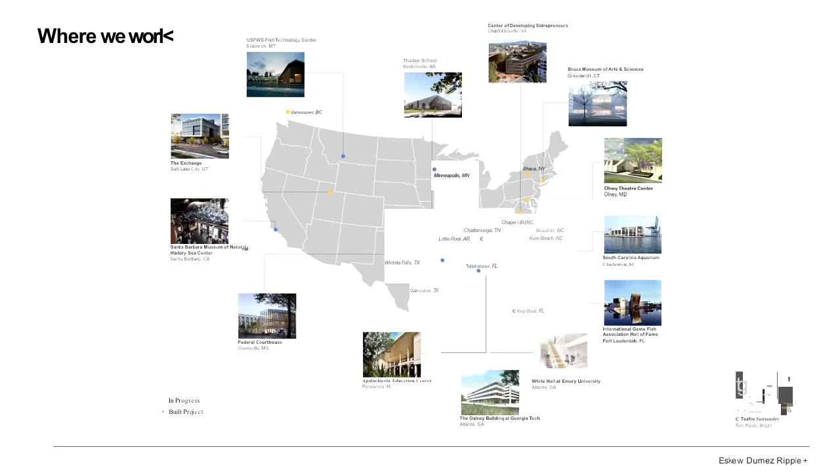So our firm is a firm of about 50 people based in New Orleans. About 70% of our staff are LEED accredited, but only about 10% of our work is LEED. So we're trying to infuse what we do with sustainability, whether or not there's certification involved. In 2014, our firm was honored with what they call the Firm Award, which is a way of singling out one practice each year that practices can look at.

We are based in New Orleans, but we work all over the country. We work for a lot of different universities. I just got back from a project we're doing at Cornell. We opened a building recently at Georgia Tech that I'll show here. We've worked with some community colleges as well. And we do all kinds of different building types. So we have a short attention span. So we work on performing arts buildings, research labs, office and conference centers, culinary programs, active learning classrooms, dorms, and student life projects.

And our practice is, I guess, unusual that for a firm so small, we sponsor a research program within our firm. So we hire one or two full-time people each year to help investigate a research question that we wished we could force ourselves to do our homework on, and so we make them do our homework for us and explain everything to us. So through that, we've examined topics of building performance, resilience, community engagement, health in the built environment, the intersection between civil engineering and landscape architecture to improve sustainability and resilience and make cities more fun, a deep dive on building envelope technology, sound and vision, and the perception of buildings.

And then the theme this year is called Deep Impact: Paths to Carbon Zero, because all of the announcements say that we have to get to net zero carbon operation in about 10 years, and we have to get to dramatically lower carbon footprint of construction. And so what our research fellows are doing this time is documenting 12 case studies of what it would take. There are some projects that are on track for doing that. There are others where you could run the numbers and say, here's what it would have cost. Here's the least cost path to doing those things. And so we're going to be sharing those results out through conferences and also guides that you can download off our website.

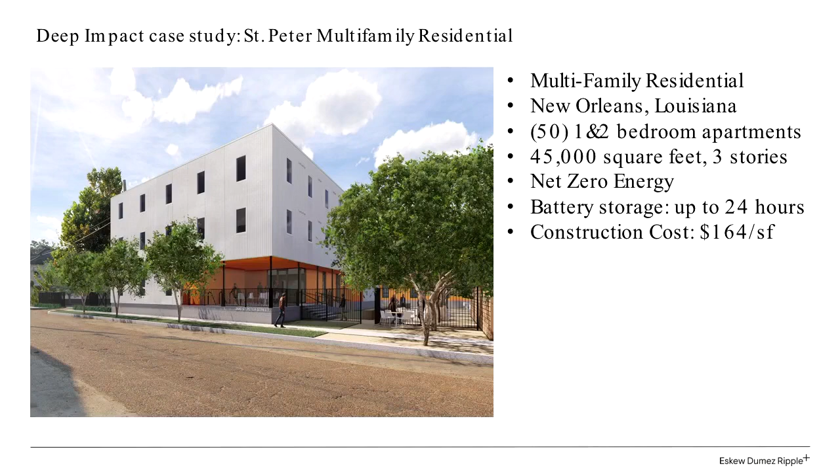A first case study right now is a project that's under construction, getting ready to open actually at the end of November. And this is the first case study to come out of that work. This is a multifamily, very bare bones, Spartan, low-cost, affordable housing intended largely for veterans and veterans with children. It's 50 apartments, 1 and 2 bedroom. It is going to be a net zero project, and it will actually have the ability to island off the grid when the grid goes down, as it does with embarrassing frequency in New Orleans due to windstorms. And it was built for $164 a square foot.

And so this is an example of the kind of work they're doing in terms of explaining that when you build a building, there's the kind of burp of carbon dioxide from when you made the concrete and when you made the steel, and if you had to cut down the trees to make the wood and so on. And then there's the carbon emissions associated with running the building every year. So this is a typical multifamily building as we build standard practice in the US, and it uses electricity and gas, and obviously there's emissions associated with electricity and gas. And therefore there's a little more carbon each year. So the cumulative amount of carbon emissions is signified by this carbon life cycle plot.

The goal that's been established by the Architecture 2030 organization is basically about a 40 to 50% reduction in the carbon emission of construction, and then net zero operation. And how they lay out a pathway to net zero operation is a mix of: you make a good, efficient building, and then you operate it right, and then that building might have some on-site renewables, some solar panels on the roof, let's say, for most climates. And then the rest, if there are still net emissions, their plan is that you can basically buy into schemes where renewable power is being produced off-site, with third-party certifications so you know it's really actually happening. So that's that middle line, that green line.

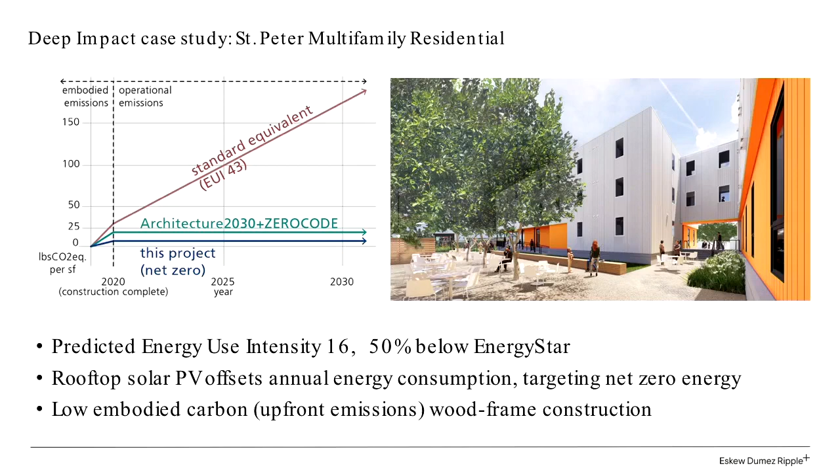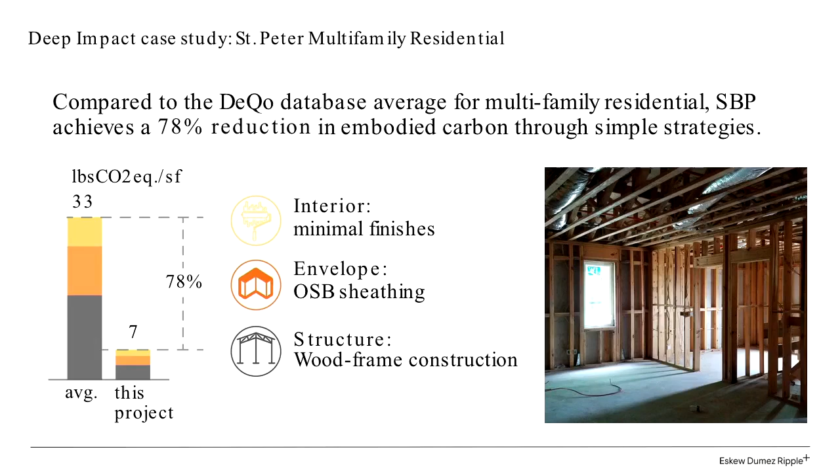So time will tell as that building goes into operation, but we're pretty hopeful. This is an example of the kind of analysis of typical construction where there might be concrete floor slabs, a very energy-intense building envelope, say brick or Alucobond or something like that, and then the interior finishes. Every choice we've made here, we've made for lower carbon of construction.

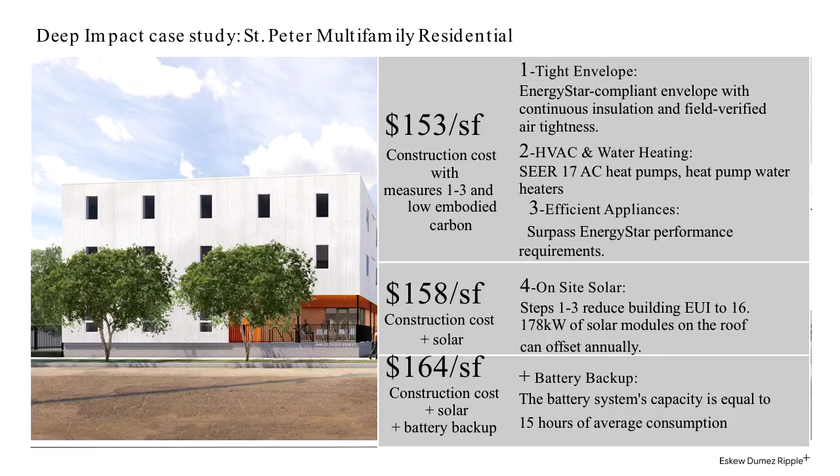And of course, the real question is, what does that cost? And so this project was spec'd out to cost $153 a square foot, just trying to do things sensibly. And then through a series of upgrades to the HVAC and adding solar and then adding battery backup, we've taken it to $164. So this is a very competitive price target. Now, obviously, that offset is an offset you could apply to fancier projects, less Spartan ones going forward. So that's just an example of what we're trying to do in our firm and what we're working with.

There are a lot of great firms in this room that are trying to pick up their responsibility and see if they can't improve their overall performance. And as architects, there's what we do when we design, and then there's the rubber really hitting the road when the buildings are opened and operate. We have to work with facilities people, who can make or break whether a building will perform as we'd expected.

So the American Institute of Architects has created this thing they call the 2030 Commitment. And as an architectural practice, you can sign up for it. And what it says is that you will basically write everything down. You will enter into a spreadsheet or an online database every project you're working on that year and what building code or energy code you're building it to, or if you've done an energy model, what you think the predicted energy will be. And it will add up the cumulative impact of all of your projects. And then they've set a set of goals where we aspire.

I aspire to a full head of hair.

I won't achieve that. But where you aspire to better and better performance, every 5 years the bar gets raised. So the gray bar here is the sum of all of the architecture firms that are signed up for this. Currently, those firms that are signed up are responsible for 30% of all construction in the United States. So even though it's only about 250 firms reporting, it's all the big guys who are doing all the big buildings. The green bar is our own firm tracking our own portfolio. And we chose, you're not required at all to make it public, we chose to disclose.

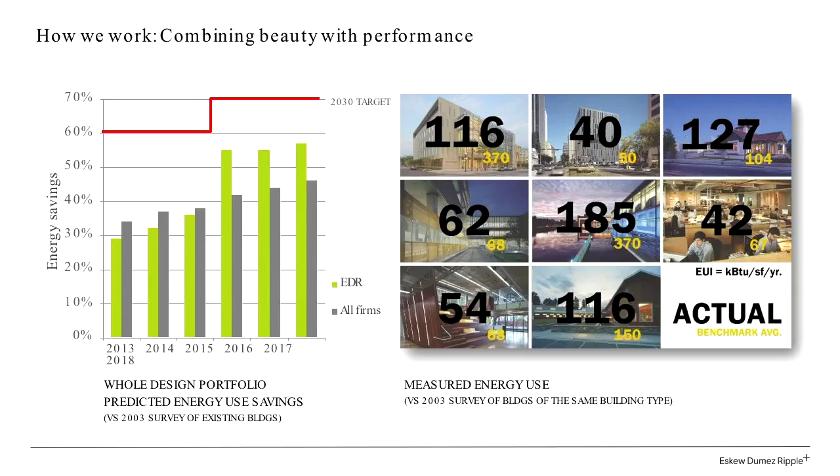Back when we first started tracking, we were tracking behind, but we were slowly inching up. And then as we applied more and more and better tools, we found that our portfolio got better and better. And so we've been sharing what we've learned from that. So this is all about design. And this is about new buildings, major renovations, and even minor renovations where you're doing things like just lighting upgrades. You track it out.

The Department of Energy does a big survey of the average energy use of these buildings. And it's sorted by building type, because laboratory buildings tend to use a lot more energy, schools more in the middle, single-family homes, and then finally apartments, often the lowest of common building types. The one building type that's even bigger than laboratories is fast food restaurants, because you've got all those deep fryers going in a small amount of area.

But the energy use intensity, and sometimes some of our projects actually use above the median, but we think it's important. That's how we know we're not fibbing, is that we'll show you a few of the projects that don't do as well as the average one. So that tracking of real performance and predicted performance is, we think, an important way for architectural practices and clients working together to do better.

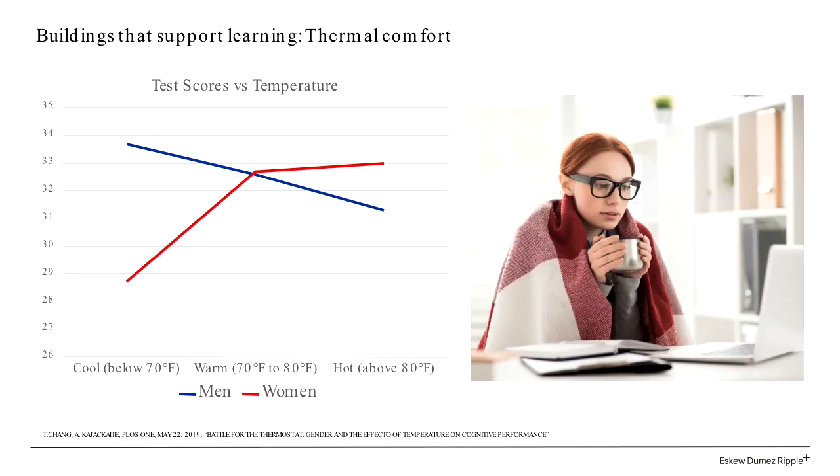One of the really interesting things that's just come out in the last year or two is, it used to be that when they did a lot of psychological and learning measurements, to keep it easy and controlled, they would only use men as test subjects. And so we have all these curves about what qualifies as thermal comfort and so on. They're all based on men, particularly college students, particularly in Kansas. That seems to be the hotbed of when a lot of this testing happened.

Recently, this was a study with people in Berlin of a range of ages, but they did a whole bunch of tests on math, cognitive reasoning, and verbal performance, and they scored it, and this is the median score. Of course, there's a huge spread, because we're all different. Not all women are the same, not all men are the same, but they did notice that there's this particular shift, which I noticed in my office, and I don't know if you notice in yours, is that on average, women tend to report being colder. Even at the same level of clothing, they'll report feeling colder than men. And if it's men in charge of the thermostat, you can imagine what the impacts of this can be.

So as we start to think about making good spaces for learning, because this is an institution of learning, it's very clear that there is an impact on performance with temperature. And what's even more interesting is how do we provide, given that we're going to have a room full of people, and not all women have the same point of comfort, not all men do. So one of the interesting shifts is people are starting to say that they want you to plan not for a uniform temperature across the room, but deliberately a variation in temperature. So the people who are comfortable with cooler and work best there can sit over there, and the people who are more comfortable with a little bit warmer can sit over there.

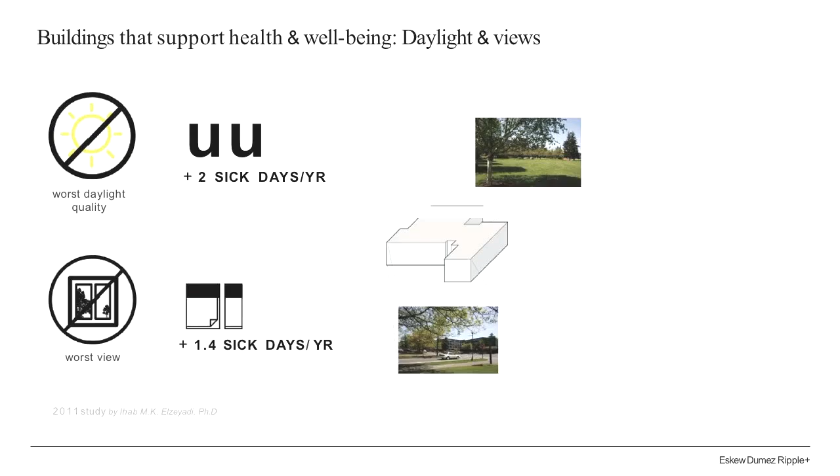And from all that, they get a rank-ordered spectrum of the nicest views to the least appealing views, straight into the cooling tower or whatever it was that the worst view was. And then they anonymously got the health records and absentee records, sorted by where those people sat and what view they had.

And what they found was that the people with the worst daylight quality took on average 2 more sick days a year, and the people with the worst view took on average 1.4 more sick days a year. So these things that we think of as luxuries or amenities, if you think how much a sick day costs a business, actually have real financial impacts.

But now I want to talk about, since we're all talking about carbon dioxide, and we're all talking about global warming and climate change, we all know that when I was born, now 60 years ago, carbon dioxide levels outside were around 250, I think, parts per million, passing 300. Now we're at about 410 parts per million.

And when I was growing up, I watched Star Trek. In the keynote, there was that talk about the original Star Trek, and there was always the life support system shutting down, and the people were like, oxygen, I need oxygen. And yet the funny thing was, with Apollo 13, a few years later, it wasn't that they were running out of oxygen. They had plenty of oxygen. What was happening was that when we inhale oxygen, we metabolize and we exhale carbon dioxide, which means the carbon dioxide level would normally go up.

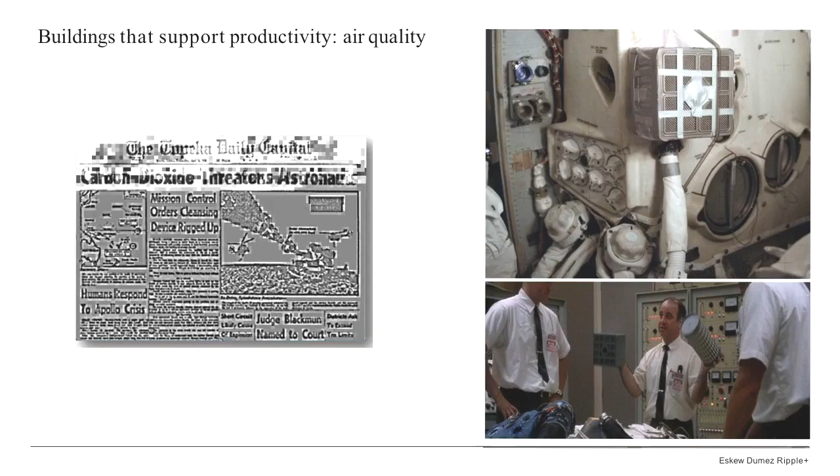So rather than carry a greenhouse behind them on the spaceship, they had these special filters which basically absorbed carbon dioxide. And their problem was that the system of filters that absorbed carbon dioxide was broken or they didn't have enough of them. And so you remember the great scene from the Apollo 13 movie where the landing module had one format of carbon dioxide absorber filter, and the main capsule had a different one, and they had to make one fit the other.

So this is what they actually did. And of course, the most important component that they had on board was duct tape. And so they made that whole system work. But that's just to tell us that indoor carbon dioxide levels, if they get too high, will kill you.

Now, a series of studies were done recently in Syracuse, New York, at a research center, University of Syracuse, that's it. And they built this amazing facility. So that's what's upstairs. It looks like corporate America, windowless, boring cubicles. But that's what's below. Every single one of those cubicles, they could change the air quality, the amount of carbon dioxide, the amount of volatile organic compounds, VOCs.

And then they invited in test subjects over the course of a week, 6 days, 8 hours a day, and they had them basically playing a game, not a video game, but a game in which you are a city manager. And you receive a series of emails, and there's a fire at the tire plant, and there's a problem at the school, and there's a this and a that. So you have to go find out, there's a fire. What's in that plant? What's that chemical? What are the risks? Should we use water or not to put it out? And so you have all these tasks, doing a lot of analysis and figuring out what you should do next, and it requires a lot of higher cognitive function.

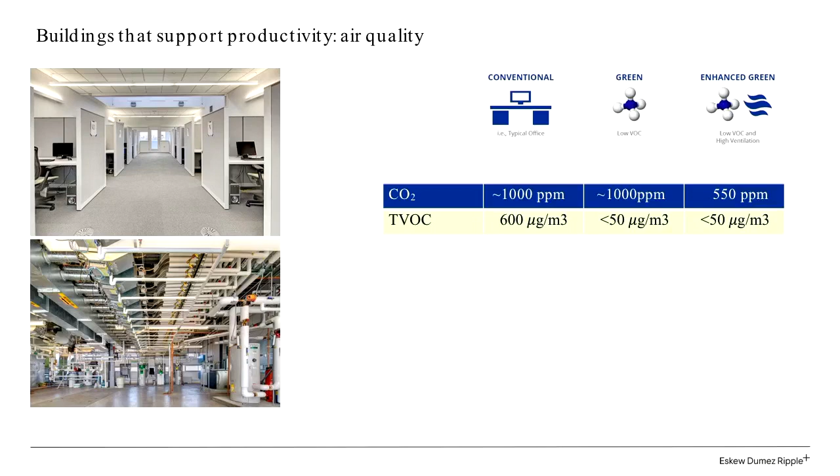So they run that experiment, and then they tried all these different tests. And they have a lot of different tasks, and I won't go through them all, but information usage, information seeking, searching, crisis response, and so on. And then they score you. How long did it take you to find the right answer? Did you ever find the right answer? And so on. And then they just normalize to each of these categories, whatever score you got under typical office conditions, and they compared the score you get in a green building and then what score you got for that task in an enhanced green building.

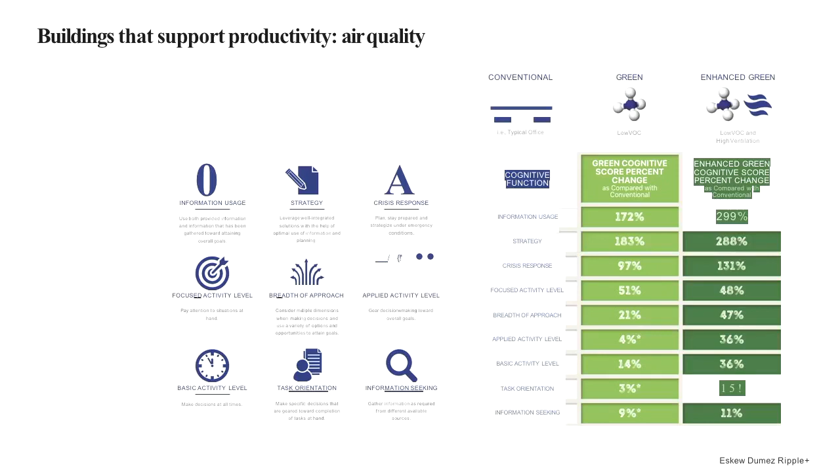So you'll see on the ability to use information, using both provided information and information that has been gathered towards attaining an overall goal, the people in these conditions got a score 3 times higher on that one measure. And so there's this range of different tasks, down to ones where you're just looking for information, Googling, something we're all good at now. There was only like 10% better, maybe barely noticeable. But averaged over all of the tasks that we ask knowledge workers to do every day, a huge difference.

In fact, they said, suppose you weren't changing the conditions of indoor air, but you had 3 employees you could pick from, one who got these normal scores, one who got these scores, and one who got these scores. It's like that infomercial, how much would you pay? How much more do people who perform that much better get offered as salaries? And the answer, they used the Bureau of Labor Statistics, and they found that difference, you would have to pay $6,500 a year more in salary to get somebody who was that much better at those mental tasks.

So when we talk about how much is a green building providing good, fresh air quality worth, it's worth, if you're not going to make your building provide that good air quality, you're going to have to go and hire a much smarter person and then stick them in your mediocre environment. So conversely, presumably, this maps to productivity and so on. So to put that in context, well, if we're providing all this air, won't that cost some energy?

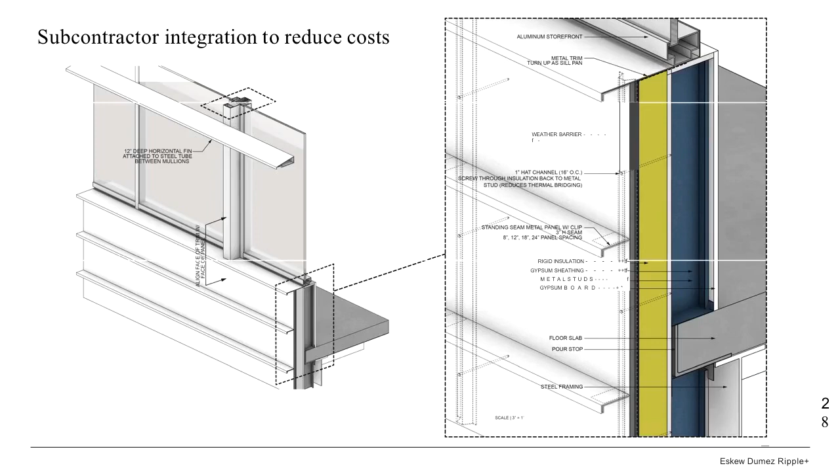And how we managed to get that cost down included working super closely with a vendor. We wanted to do solar shading, and the typical way is you just order up a whole bunch of aluminum fins. Aluminum fins are really energy intense to make and expensive. And so we worked with a local vendor of standing seam roofs, and we designed a way to achieve that same look and performance using just brake metal forms.

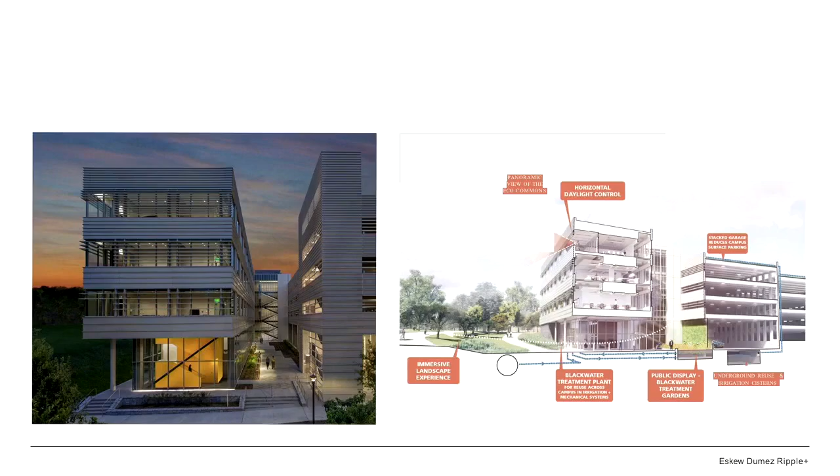That's new construction, but I also want to talk about applying these approaches towards getting better energy performance on 20, 30, 40-year-old buildings. This building on the left here is the external view. We did a renovation of about half the floors of this building in the downtown medical campus, called the JBJ Labs project. So this is a lab renovation. Now, labs typically cost $500, $600, $700 a square foot in new construction because there's so much stuff going on in a lab building. This renovation was done for $158 a square foot.

And so we took these windowless cubie labs and blew open all the walls. That glass that you saw on the outside view was glazing that you only got to see if you were in the corridor, because the building was designed at a time when they thought that looking out the window might distract the scientists. So we blew all that open, and we made it so that this building is plug and play.

So each of those lab benches actually just gets all the stuff they need from the ceiling. And if you want to play a trick on your fellow scientist, you can pick up and move her lab bench to another end of the building and plug it back in. That's really about adaptability, to keep the overall life cycle cost of running such a building and maintaining and modifying it as low as possible.

We opened up all this glazing, and they said, but won't that cause glare on the south side of the building? And so this has the first installation in the state of motorized blinds that just come down and tilt according to where the sun is, with a little sensor on the roof. And so we said, no, we can give people a view, we can give them sun when they want it, and it's under automatic control, but you can override it.

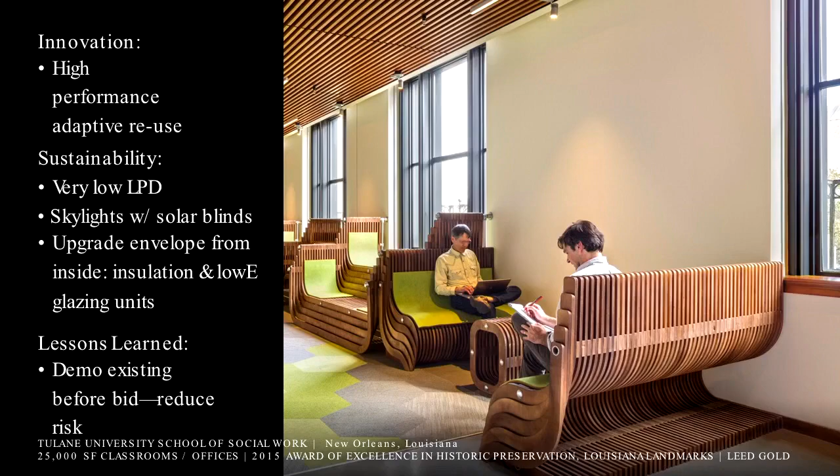And we were able to do that because when you're working in an old building, the biggest risk at bid time is the contractor feels like, I don't know what's inside this building. When I open up those walls, there'll be a pipe and I didn't even know it was there. I'm seeing nods of recognition. So we convinced the owner to actually break out demolition and let a contract for demolition to gut it down to clean interior walls. And then we did a walkthrough and we held the pre-bid meeting inside the gutted space. And that helped the contractors have a much greater degree of certainty about what it was really going to cost to do this upgrade.

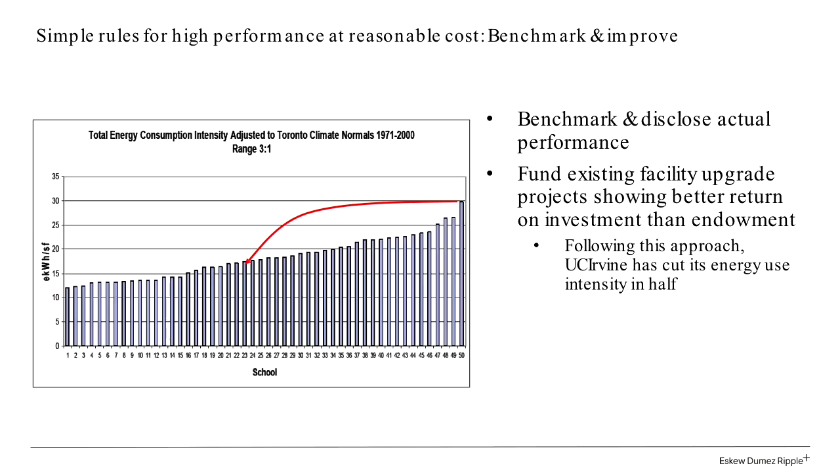Simple rules for what could be applied, and you're from all over here, not just DCCCD. The first one I want to call out, because we've got people who are into building operations here, is that individual choice or operator choice has a huge impact. This is a survey of 50 schools. There was a big school building boom in the late 60s, early 70s in the Toronto metropolitan area. They built 50 schools. They had a pattern template that they used, and they would change where the entrance was, but it was essentially the same design, modified for 50 different locations around the metropolitan area.

So they were all about the same time. They all had about the same budget per square foot. And then they finally pulled together how much they were actually spending on utilities for each building. And intriguingly, what they found was a 3-to-1 variation between the most efficient school in energy use per square foot per year and the least efficient one. Remember, same building type, essentially same building design, same climate. These were all operational choices.

When the principal of this school was told, this is your school, within 6 months, she moved her school to the middle of the pack with low-cost, no-cost interventions. Just people paying more attention. Now, principals have a lot on their plate, right? And part of it is just informing people where they stand can have a huge impact. It's not about shaming. It's just like, oh, it's possible. That's the big secret, is that it's possible to make a building that runs at that much lower cost.

And there are a lot of school districts that wisely, famously the Poudre School District in Colorado, that basically said 3/4 of all the savings flows right back into your budget, principal. And so it became, not a profit center, but a center for getting all the discretionary money you wish you could have for programs. So you aligned people's shared savings results in a shared benefit. So operations choices matter.

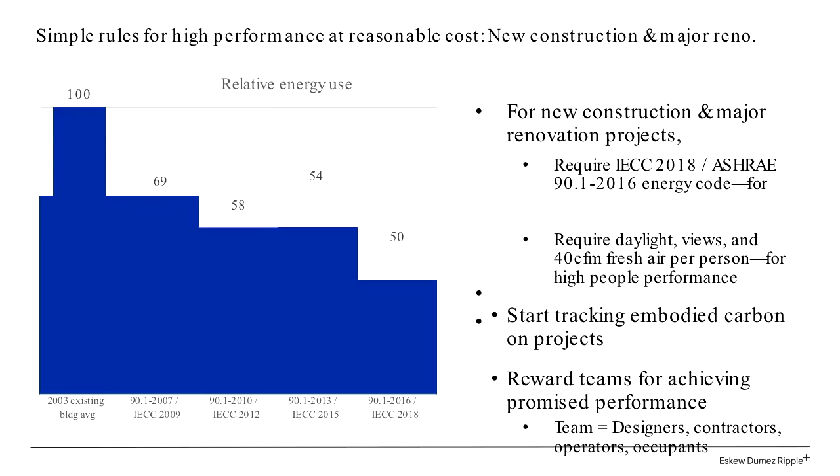So right now we've got 15, 20 people in this room. So say if we had 20 people, we need 800 cubic feet per minute of fresh air in this room. When it has 100 people, we need 4,000, right? So we need to make buildings more responsive so that we can deliver it. What we've found in many buildings is there's no actual increase in the maximum capacity of fresh air the building needs. It's all about sending it where it needs to be. So one of our things has been finding ways to work with mechanical engineers on that.

I started to mention at the beginning of the talk the idea of embodied carbon. This is the thing people, especially in historic preservation, have been saying forever, which is, the most sustainable building is the one that's already there. But people have started to do the math.

Right now, about 30% of all carbon emissions worldwide is traceable to the operation of the buildings that exist, the electricity, the gas they use. Another 10% of all the carbon emissions worldwide are the buildings we're building this year. It's the carbon of construction. So for that 30%, well, those buildings are all there, and we're only adding 1%, 2% per year. So if we made every building net zero for the next 10 years, that's nice, we feel better about ourselves, but the impact will be very modest.

On the other hand, if we cut the carbon intensity of every building that we're building, the carbon of construction, in half, which seems achievable just by being careful about stuff, that's this huge effect. That's like cutting global carbon emissions by 5%. And that's under the direct control of the people who are specifying new construction and the architects and structural engineers who are writing the specs. So getting our head around embodied carbon is like the new big thing.